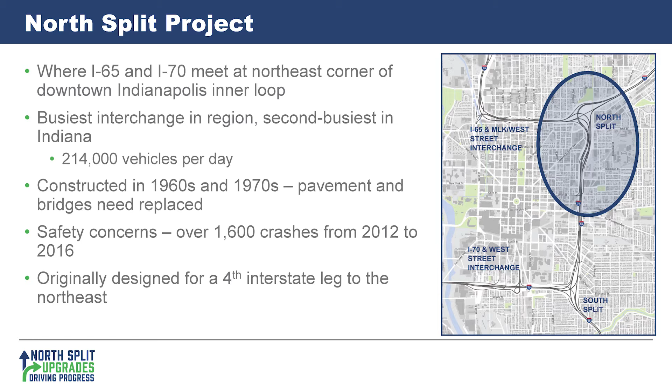The North Split interchange is located at the northeast corner of downtown where I-65 and I-70 come together. It is the busiest interchange in the region and second busiest in the state. The original pavement and bridges are from the 1960s and 1970s and need to be replaced. There is also a need for safety and operational improvements. The original design included connections for a fourth leg to the northeast for an interstate link to I-69. That interstate segment was never built.

The primary need in the project area relates to the deteriorating condition of the infrastructure. With a few exceptions on I-70 east of the interchange, all bridges in the project area are in poor condition and need to be replaced. The pavement is also deteriorated due to heavy traffic and age, and needs to be replaced.

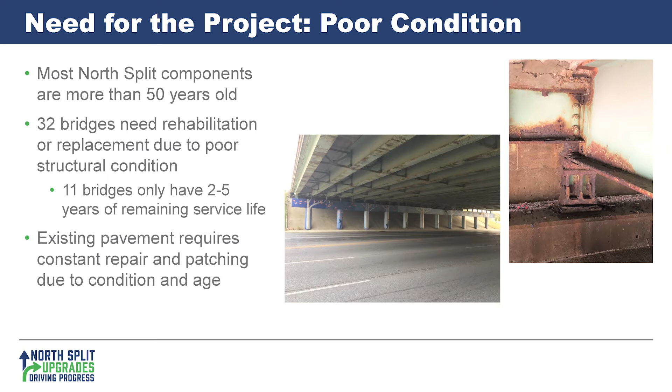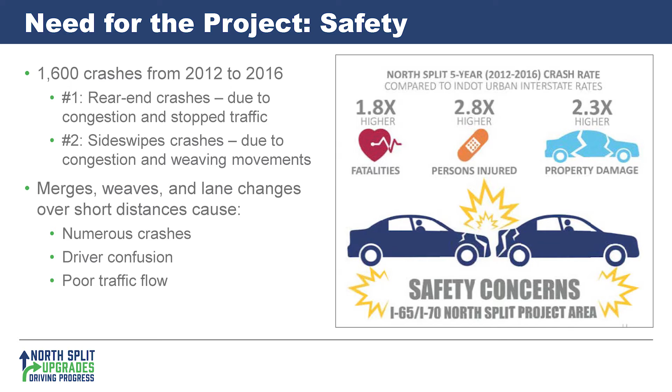The North Split has more crashes than most urban interstates in Indiana, averaging almost a crash per day. Traffic merge areas are too short and traffic is forced to cross and change lanes over short distances. This results in a high number of sideswipe crashes and rear-end crashes due to stopped or slowed traffic. The worst safety problems are where traffic is forced to cross, in segments known as weave areas.

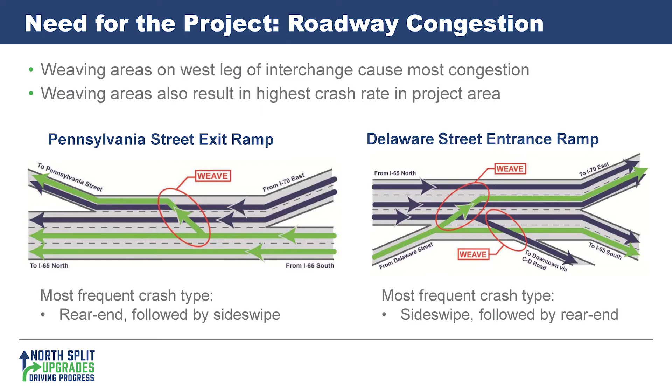The most hazardous areas of the North Split are at Pennsylvania Street, where exiting traffic from I-65 must cross all traffic from I-70, and at Delaware Street, where entering traffic to I-70 must cross all I-65 traffic. Besides causing the highest number of crashes, these two weave areas are also the greatest cause of congestion in the North Split, causing traffic to back up every day. Together, these conditions define the purpose and need for the North Split project.

The purpose is to rehabilitate and improve the existing interstate facility. The need is to correct deteriorated bridge and pavement conditions, improve safety, and improve interchange operations. This purpose and need will be met by replacing the infrastructure, eliminating the weaving sections, and applying modern design standards to improve traffic flow and overall safety.

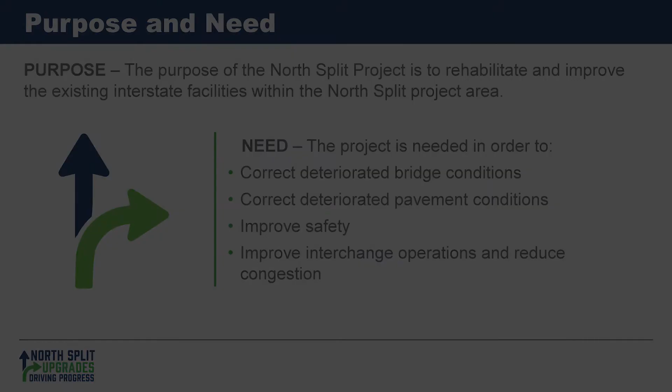Alternatives were analyzed and provided for public review in a screening report in fall 2018. The alternatives evaluated ranged from doing nothing to expanding the interchange with more through lanes. The first test was whether an alternative meets the project purpose and need.

Alternatives 1, 2, and 3 were eliminated at this stage. The no-build alternative, transportation system management—which is other actions and alternatives with no physical improvements—and replacing infrastructure as is, would not fix safety and congestion problems. Alternative 5 would meet the purpose and need and would add more through lanes. It was eliminated due to the impacts the widening would have in the project area.

This left one alternative, Alternative 4, which would improve existing conditions without adding new through lanes. It had 3 variations which differed in how the Pennsylvania and Delaware weave areas were eliminated, with trade-offs in service and level of impact. To meet the project purpose and need, the weaves at the Pennsylvania and Delaware street ramps had to be eliminated.

One way to do that would be to close the ramps entirely. Alternative 4A would do that. This option would have the least physical impact. The footprint of the interstate through that area would be the same as existing, as shown here. This option would also have the greatest traffic impact, since all access at these ramps would be lost.

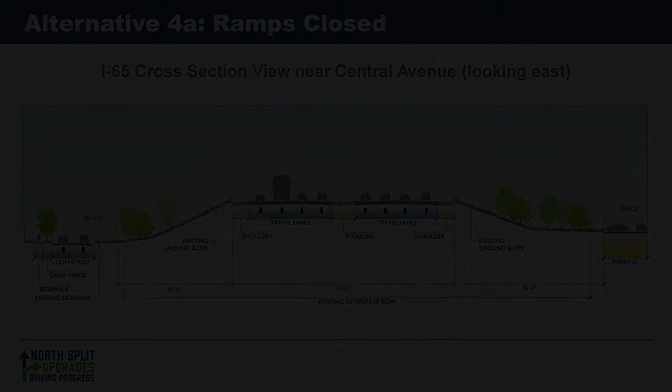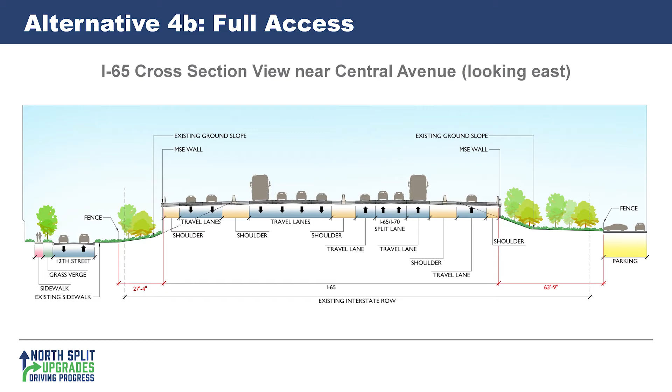After holding public meetings and soliciting public input, Alternative 4C was deemed to provide the best balance of traffic service and impact. Alternative 4C was selected as the preliminary preferred alternative.

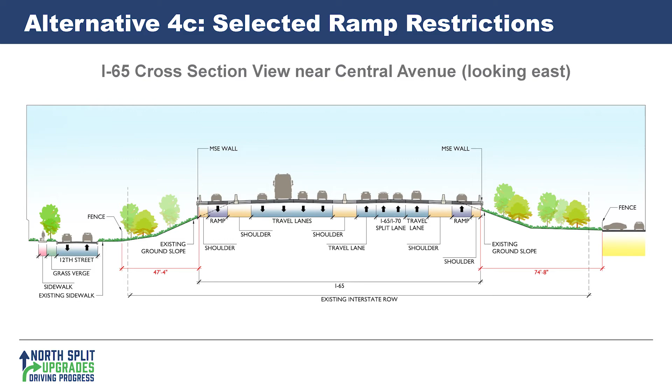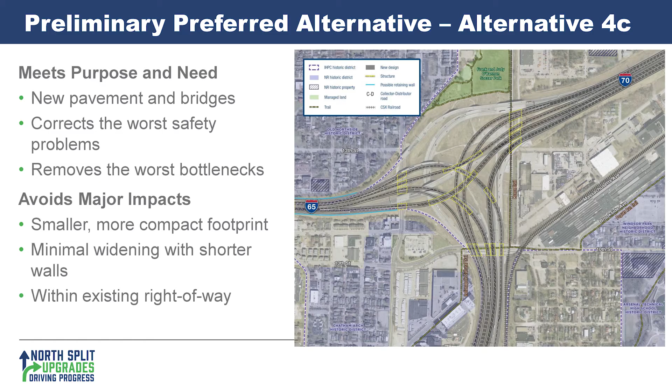It has a smaller, more compact footprint than the existing interchange, with minimal widening and shorter walls, and can all be done in existing right-of-way.

Minimizing impacts with Alternative 4C requires two compromises with respect to service. The Pennsylvania Street exit ramp would continue to have access from I-65, but there would no longer be access from I-70. Models show most of this I-70 traffic would divert to Michigan or Ohio Street, with minimal diversion to West Street.

The Delaware Street entrance ramp would continue to access I-70 and I-65 southbound, but there would not be access to the collector-distributor road leading to Michigan Street, Ohio Street, and Fletcher Avenue. These are movements that exit downtown on the north and re-enter downtown on the east. Volumes are relatively small.

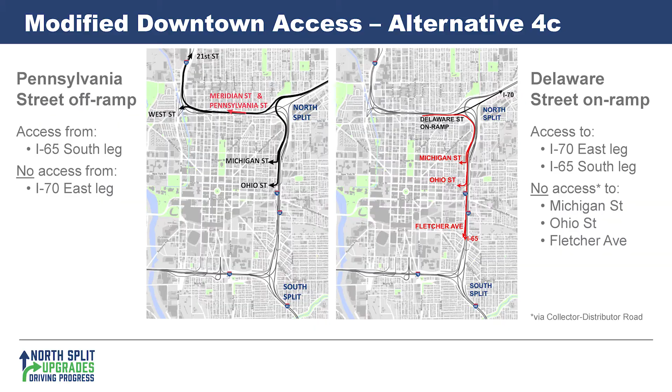The Environmental Assessment, or EA, is the environmental document for the project. It is required per the National Environmental Policy Act, or NEPA, and analyzes impacts to both the human and natural environment. After the public comment period for the EA, the Federal Highway Administration will issue a finding of no significant impact, or FONSI, or make the determination that the project will result in significant impacts to the environment, and an environmental impact statement is required.

Next we will discuss some of the key environmental focus areas for the project. There are many historic districts and properties next to the North Split project area. Section 106 of the National Historic Preservation Act is a law that protects historic districts and properties.

An adverse effect under Section 106 was identified for 4 historic districts or properties: the Old Northside Historic District and Morris Butler House within that district, the St. Joseph Neighborhood Historic District, and the Chatham Arch Historic District. INDOT is making commitments to mitigate impacts to these historic resources. Commitments are documented in a Memorandum of Agreement, and in the EA.

INDOT studies noise impacts when making changes to existing interstates like the North Split. 5 potential noise barriers were identified per the INDOT traffic noise policy. 2 noise barriers are recommended based on benefited receptor surveys and other factors, such as visual impacts to historic properties. These noise barriers, 3E and 3W, are located north of I-70 and east of the interchange.

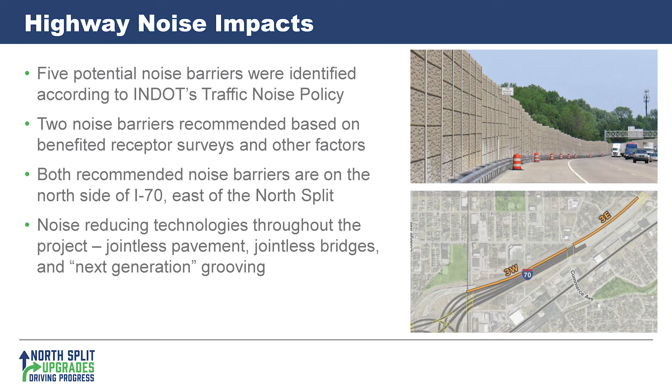Environmental justice, or EJ, includes fair treatment and meaningful involvement of all people regardless of race or income. For highway projects, it involves identifying and addressing disproportionately high and adverse effects on minority and low-income populations. It also involves equitable distribution of benefits and burdens.

As part of the EJ analysis for the project, potential EJ populations were identified using census data. INDOT organized and consulted with an EJ working group, which was very helpful for the process. An EJ public survey was also conducted.

The public survey was heavily advertised, and over 1,600 surveys were completed. Responses from EJ and non-EJ community members were generally similar. No disproportionate impacts on minority or low-income populations were identified. The EJ analysis is documented in a technical memorandum and is an appendix to the EA.

We have covered several community impacts, and now we'll discuss how traffic will be impacted by this project. Long-term traffic impacts will be minimal since no new through lanes are added, but there will be major traffic impacts during the 2 years of construction.

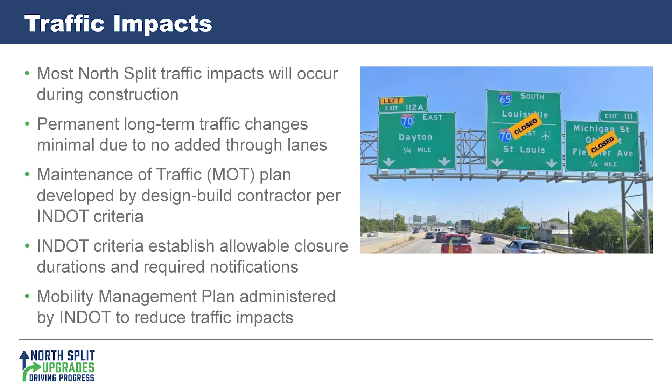As INDOT prepares for construction, a detailed maintenance of traffic plan for the construction zone itself is still in development. The overall closure plan and allowable closure periods were already set by INDOT, so the extent of roadway closures is known now. INDOT will administer a mobility management plan to reduce traffic impacts during construction.

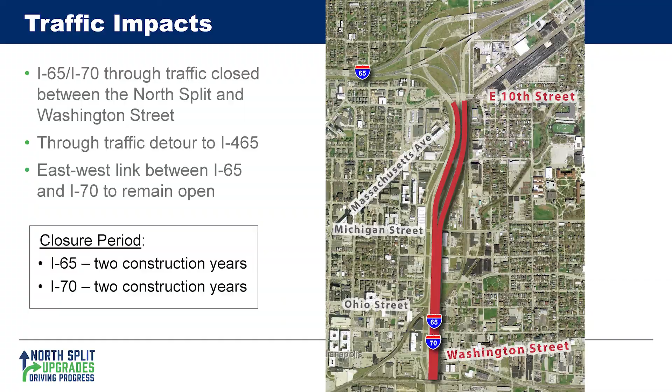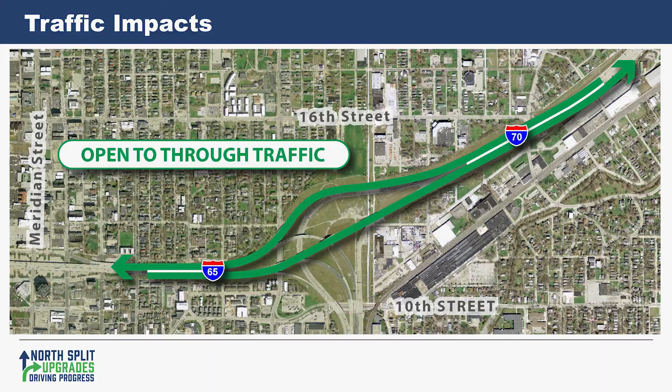Exit and entrance ramps across the north side of downtown will remain open except for a short period, up to 90 days, to reconstruct ramps at Pennsylvania Street and Delaware Street. Entrance and exit ramps will also remain open on the east side of downtown. Access to eastbound I-70 will be provided at Pine and Michigan Street, as it is today.

Access to downtown from I-70 will be available from the Collector Distributor Road, which will be open to the Michigan Street exit or the Ohio Street exit, or both. Each exit will be closed up to a year, but they cannot be closed at the same time. The Collector Distributor Road will be closed south of Ohio Street. This is to preclude use by through traffic, and to close the Fletcher Avenue exit.

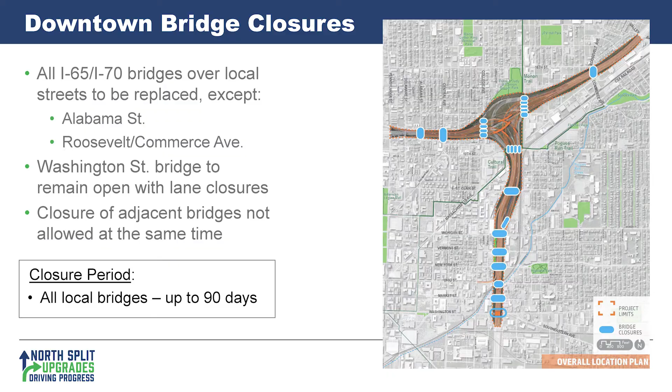Local streets will need to be closed while interstate overpass bridges are replaced. Closures of up to 90 days will occur at these locations. Bridges adjacent to each other cannot be closed at the same time. Washington Street is wide enough to build in stages, so lanes will be reduced but the underpass will not be fully closed. INDOT will administer a mobility management plan to reduce local traffic impact during construction.

The plan has 3 major activity areas: traffic operations, travel demand management, and enhanced information for motorists. Activities related to the mobility management plan will continue throughout the construction period. It will be important for the surrounding traffic system to operate at a high level of efficiency during construction. INDOT is working with the city to upgrade traffic signals and traffic monitoring systems throughout the region.

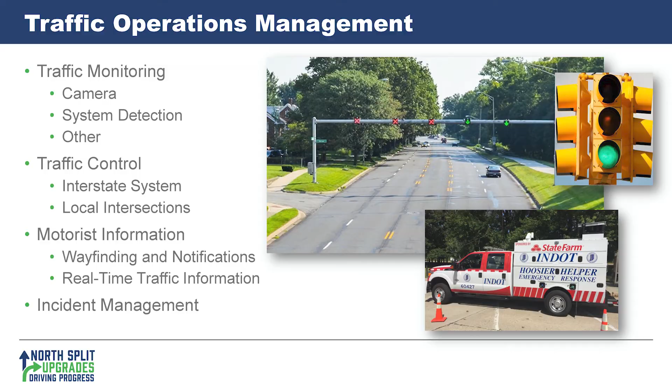Most of the work, in and near downtown, will be completed this year. Spot improvements are underway to improve the efficiency of streets serving downtown. Most of these will also be finished this year. INDOT will work with emergency responders to establish incident management plans for quick and efficient response, in and around the construction zone. Travel demand management strategies focus on reducing peak period travel, to flatten the curve, so to speak.

One way to reduce demand on roadways is a shift to other modes. INDOT is exploring strategies to promote use of transit, carpools and vanpools, and biking and walking. An employer education program will encourage work rescheduling strategies, or increased opportunities to work remotely during congested periods.

INDOT will provide frequent, up-to-date bulletins on expected travel restrictions and closures. INDOT will apply its extensive communications technology programs to provide travelers with real-time information on current and anticipated traffic conditions. The objective will be to provide travelers with the best information available as they decide how to travel, when and where to travel, or whether to travel at all.

The purpose of the aesthetic design guidelines is to provide the landscape architects with aesthetic direction for their final design.

The aesthetic design guidelines are the result of an extensive public engagement process over the last 12 months, including meetings with local neighborhoods and neighborhood organizations, local agencies and oversight departments, key local resource groups, local business organizations, and stakeholder groups. The CSS process used to develop the aesthetic design guidelines included visioning workshops with the local community, developing preliminary design treatments, public review and comment on the preliminary concepts, and ultimately a series of design enhancements developed in conjunction with the community.

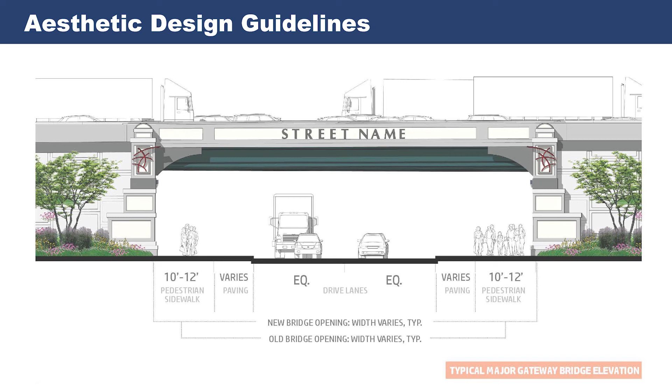Specific placemaking opportunities will accommodate future public art on the monuments. Wall surfaces will provide a simple pattern, as requested by adjacent neighborhoods. Each underpass was developed with a consistent design vocabulary allowing for subtle variations while still retaining continuity across the project, even on bridges not being replaced.

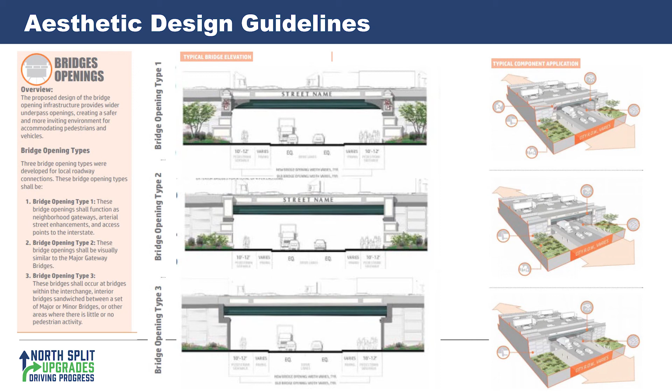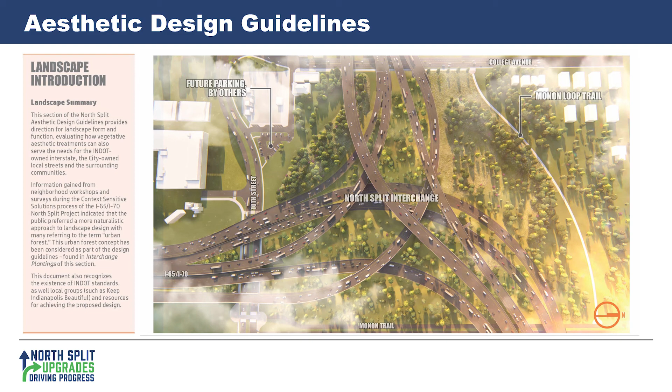The second most noticeable aesthetic element of the guidelines is landscape treatments. After extensive meetings with local representatives, the resulting landscape applications include an expansion of tree canopy to create an urban forest-type landscape throughout the project. This is an aerial view looking down on the main portion of the interchange. Landscape treatments include ground-level plantings, slope plantings, native seed mixes, shrubs and a mixture of trees to create a consistent landscape across the project. The landscape reduces overall maintenance while producing an urban forest downtown.

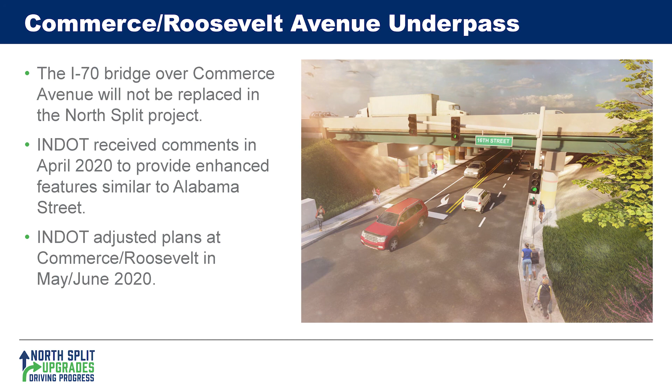The aesthetic design guidelines also provide some limited applications to bridges that are not being replaced as part of the project, including Alabama Street and Commerce/Roosevelt Avenue. The Commerce/Roosevelt Bridge was previously reconstructed in an earlier project, so it is not being replaced now. INDOT received public comments in April 2020 requesting enhanced features at Commerce/Roosevelt, similar to other bridges. INDOT has adjusted plans at Commerce/Roosevelt in response to those comments. For the Commerce/Roosevelt Bridge, these limited applications are included in this project.

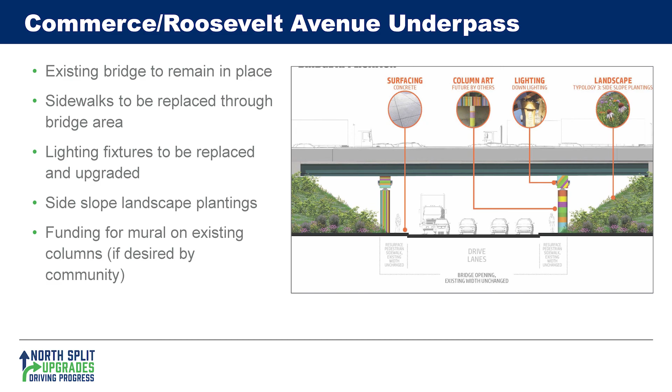The existing bridge will remain in place. Sidewalks will be replaced through the bridge area, within INDOT's limits. Lighting fixtures will be replaced and upgraded. Side slope landscape plantings will be included in areas adjacent to the bridge. INDOT will also provide funding for a mural on the existing bridge columns, if chosen by the community. These applications help the bridge fit within the overall design vocabulary for the project while improving connectivity and safety, and providing for placemaking opportunities with the adjacent neighborhoods.

Today, you heard a summary of the North Split project to date, ranging from environmental study to traffic impacts to CSS solutions. The next steps for the project include the following: the public comment period for the EA is now open, with comments due by August 17, 2020. The environmental study process will conclude with NEPA determination by FHWA. Construction is anticipated to start in late 2020 and finish in 2022. This concludes the presentation. Thank you for viewing the North Split public hearing presentation.